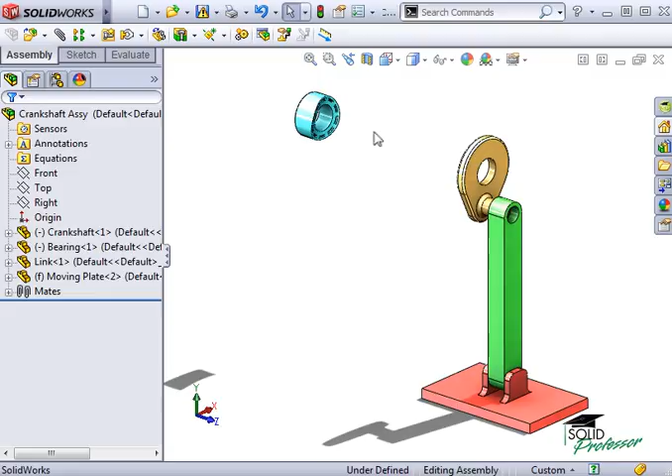Here's an example of top-down assembly design. For this assembly, we want to create a crank that extrudes from this component up to the surface of this component. We want to make sure that no matter what the shape of the face is, the extrusion will always extend exactly up to the end face.

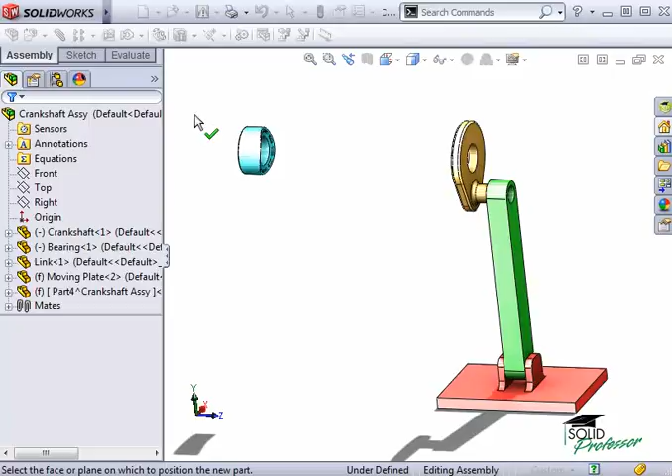To do this, we'll begin by inserting a component, new part, from the assembly toolbar. An icon will appear by the cursor, prompting you to select a face or a plane to start sketching on. In this example, we'll select this face as our sketch plane. Notice that we are automatically placed in Edit Sketch mode. Now I will select this face and use the Convert Entities tool on the Sketch toolbar.

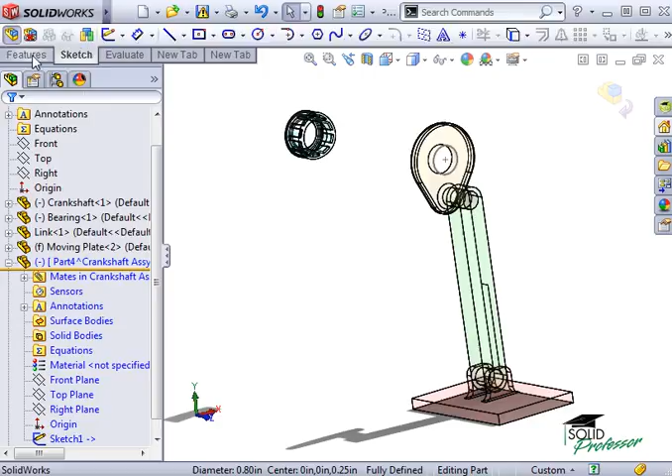Next, I'll click the Extruded Boss icon on the Features toolbar. In the Boss Extrude Property Manager, under Direction 1, click the drop-down menu and select the Up to Surface end condition. Here I can select the surface that I want to extrude the crank up to. Finally, I'll click on the green check to complete the extrude feature.

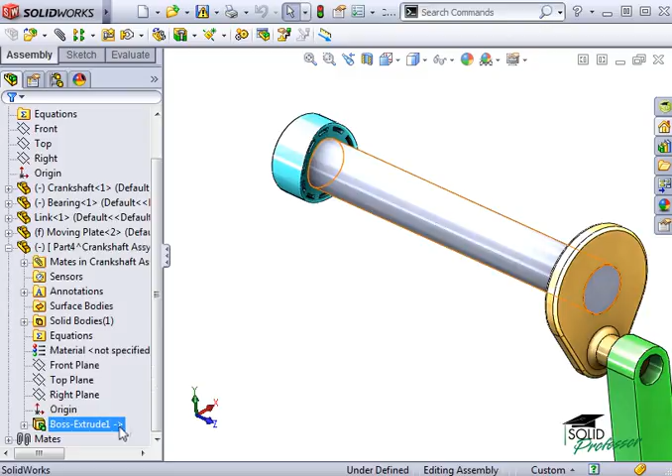If you look at the Feature Manager tree, the part I'm working on appears in a different color, indicating that I'm still currently editing the part. To get out of Edit Part mode, I can click the Edit Component icon and I'm taken back to the main assembly. Now, if you look in the Feature Manager tree, you'll see the Extrude feature has an arrow next to it. This indicates that there is an in-context relation present.

Now, if I make a change to the distance from one component to the other, the crank will update accordingly. And there you have it, a simple example of top-down design.